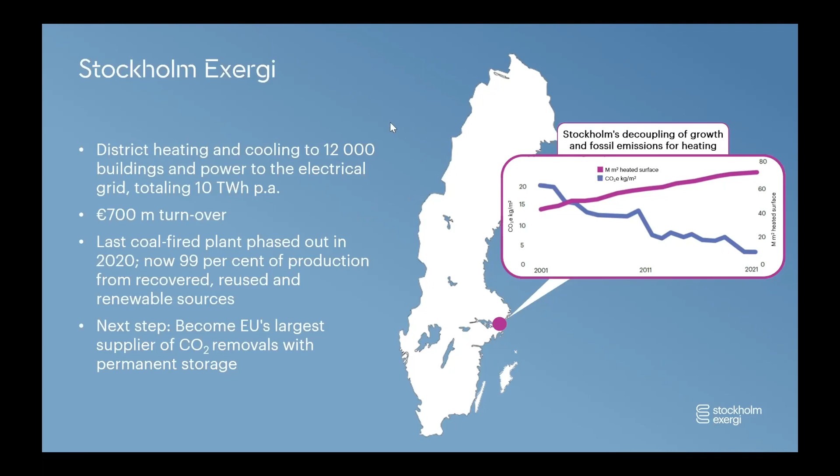In this work with becoming more sustainable and giving our customers a sustainable alternative for heating, we have also, as you can see in the graph on the right-hand side of the picture, managed to decouple carbon footprint from growth, which is something we are quite proud of. As a company, we are owned 50% by the city of Stockholm and partially by private pension funds, five of them, all European. So there is no majority owner in our company, but two equally strong owners, which has its advantages and other sides too.

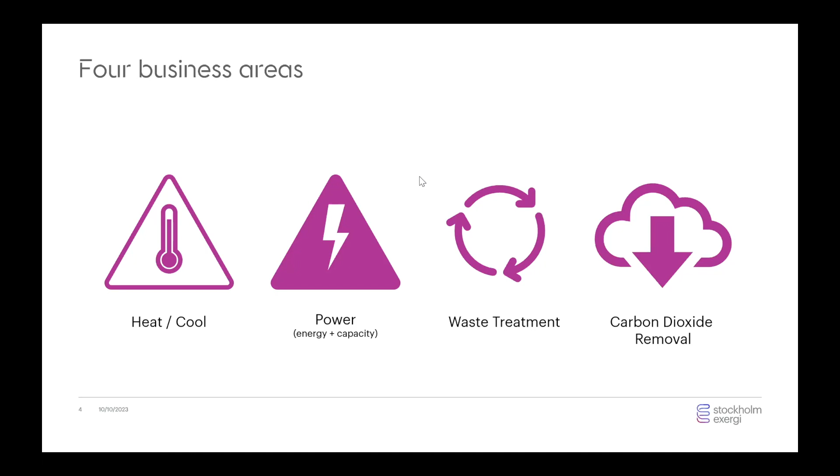From a business perspective, we work today in 3 business areas: one is heating and cooling, another one is about power production and also providing services to the power grid owners when it comes to capacity and balancing services. We are also heavily involved in waste treatment as a company, and now we are looking to establish a 4th business area, which is carbon dioxide removal.

So Stockholm and the city of Stockholm, I will tell you a bit about the platform on which we are now deploying BECCS, because I think it really matters. So Stockholm is a city of very many circular flows. And to introduce this, I will show you a short movie, which comes here, I hope.

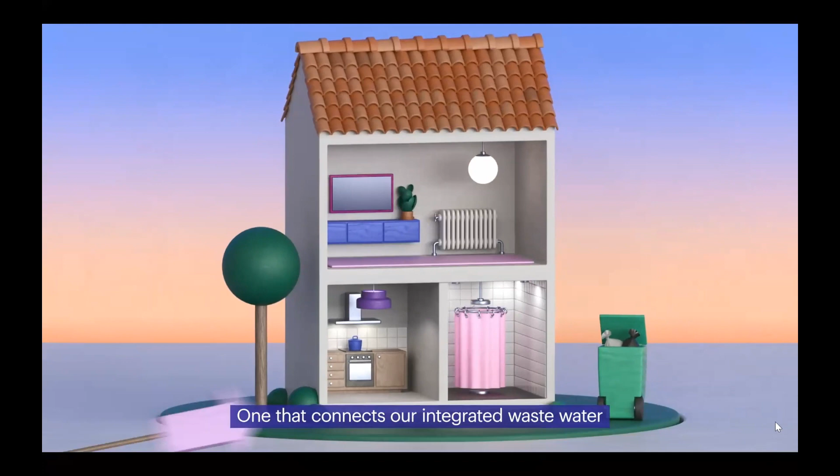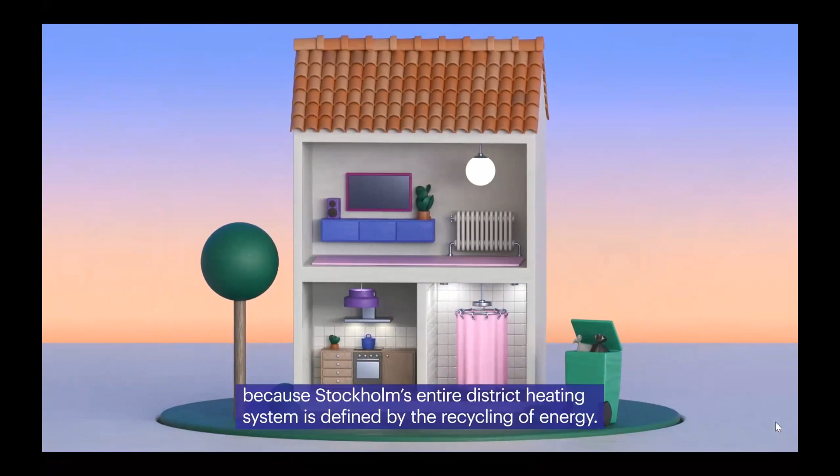Preparing food, dinner time, your evening shower, and finally relaxing with your smartphone. As you go about your evening routine, you're part of the world's most advanced energy system, one that connects our integrated wastewater, refuse, heating and electricity systems to maximize the amount of energy that is recycled. In fact, you generate a lot of this energy yourself because Stockholm's entire district heating system is defined by recycling of energy. So how does this work?

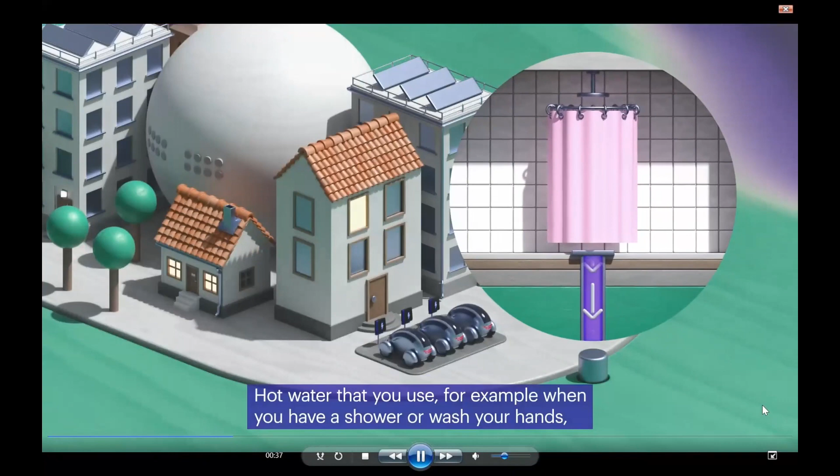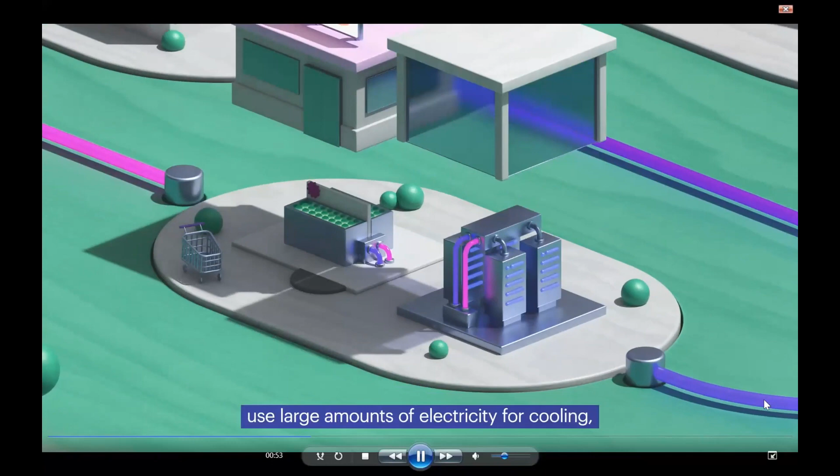Let's start with wastewater. Hot water that you use, for example, when you have a shower or wash your hands, disappears down the drain. We take the remaining heat in this water and turn it into new district heating. Then there's excess heat. Stockholm's data centers and grocery store refrigeration units use large amounts of electricity for cooling, which generates excess heat. We capture this heat and reuse it. And lastly, sorted residual waste. With sorted waste, Stockholm Exergi takes care of residual waste that cannot or should not be recycled. In this process, we recycle energy and generate heat and electricity.

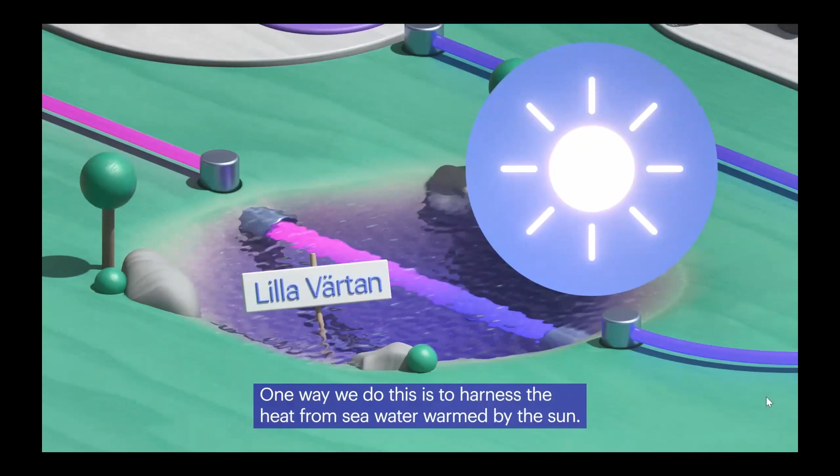We do this in combined heat and power plants, or CHP plants. Incineration of waste powers steam turbines that generate electricity, with steam then being used to heat water for district heating. A win-win situation. Electricity is supplied via the grid, and hot water is pumped into 3,000 kilometers of piping to your home. If recycled energy does not meet demand, we provide heat with the help of renewables. One way we do this is to harness the heat from seawater, warmed by the sun. We use this renewable energy for district heating.

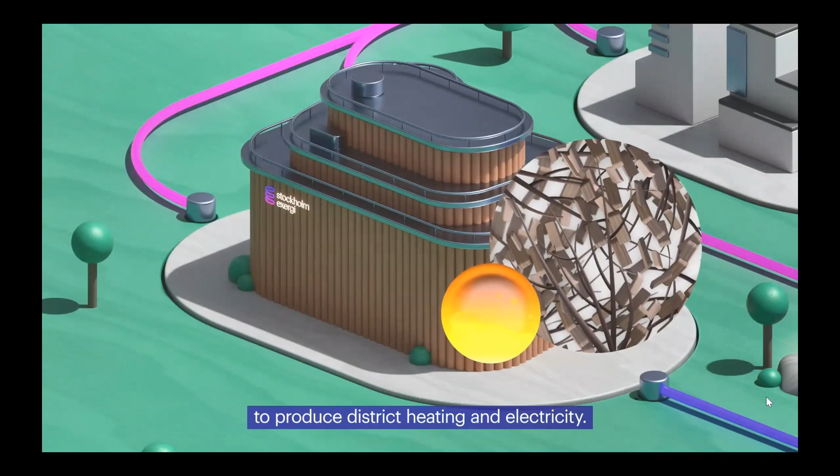We also use residual products from the forestry sector, for example, wood chips, branches, and treetops. All these become renewable biofuel that we burn at our plants to produce district heating and electricity. This is how Stockholm's district heating system works. We generate district heating and electricity entirely from recycled energy or from renewables. All this makes it easy for you to be part of a solution, which is both resource efficient and good for the climate. If you want to learn more, please visit stockholmexergi.se.

So this was a short introduction to the platform for innovation, which is what we consider our district heating system to be. The district heating system in Stockholm is really extensive. It's 3,000 kilometers of pipes sitting underneath the ground, which allows us to transport energy from where it's in excess to where it can be used, including, obviously, our own production, but also, as was mentioned in the film, we collect waste heat from different places in the city.

We actually buy this waste heat from the ones who can provide it, to use it in the district heating system instead of producing energy from fuels that can otherwise be saved. So this is a very important platform that we are now starting from when we are implementing CDR or BECCS in Stockholm. Oops.

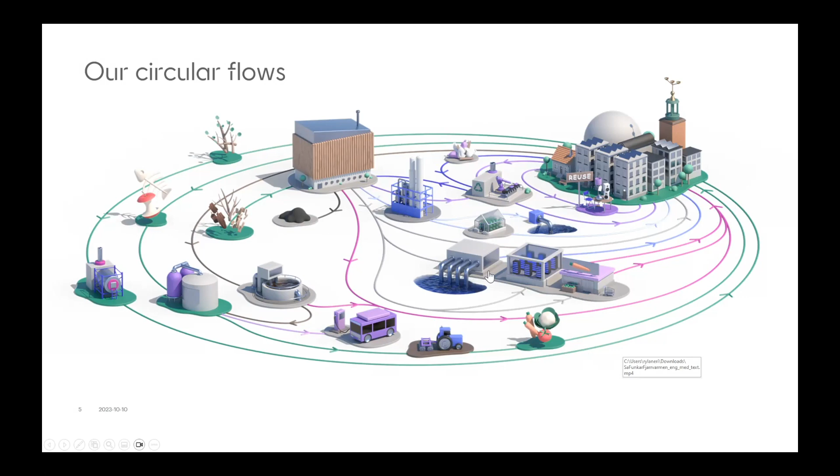When we use residues from the forest industry and paper pulp industry in Sweden, we are not harvesting any woods in Sweden just to burn them for bioenergy. All the harvesting is done by hardwood products industries and paper and pulp, and we take what they are not using from what they have harvested. So that would be trees, branches, tops, bark, that stuff. That is what goes into the energy production process.

And when we incinerate those residues in our plants, the same carbon that was once absorbed by the trees is released and normally emitted to the atmosphere again, so that this is a closed circle for the carbon. The same carbon that was once taken out of the atmosphere is released back into the atmosphere, hence a zero process.

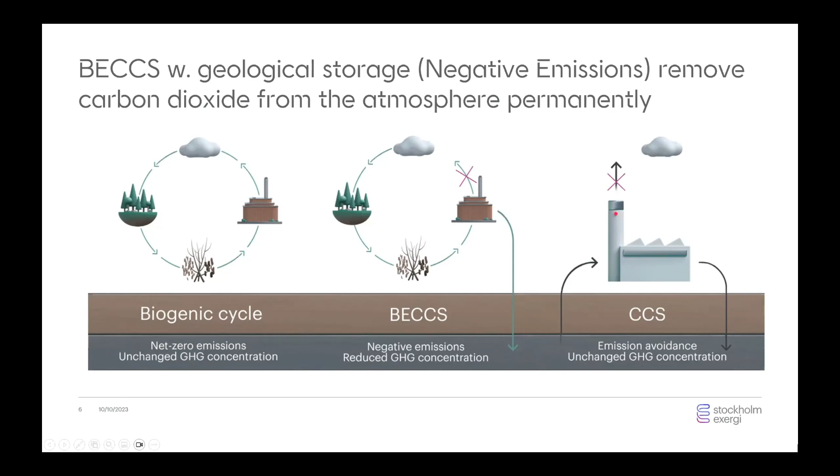So the project that we are now planning to deploy is a BECCS facility that will remove 800,000 tons of CO2 from the atmosphere on a yearly basis. We can also do this in a very energy efficient manner because of the district heating system, because all the energy that we invest in this process as electricity used in the capture and liquefaction processes can be reused as heat at the end of the process.

So we recover all the waste heat from the process, and this in the end sums up to that we are actually using more of the fuel energy going into the CHP after we have installed the CCS equipment than we actually do today. So it is a very energy efficient process with practically no energy loss. We are using sustainable biomass, and there, as I said before, we will do no additional outtake from the forests just because we are implementing this technology. I will come back more to the biomass and the criteria we have established for sourcing the biomass.

In this process, the capture process, we have chosen the HPC technology, which is hot potassium carbonate. This is a very mild chemical, and one reason for choosing that chemical is that we are operating in the middle of a city, in the middle of Stockholm. So, for example, amine technology we consider less suitable in this case. Also, we have a fairly high concentration of CO2 in our flue gases, around 19%, which is beneficial if you want to use the HPC technology.

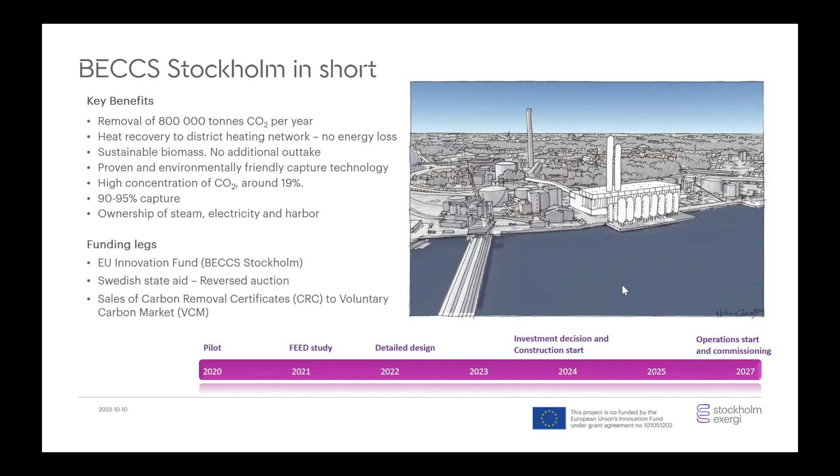We have also, in the meantime, submitted our environmental permit application to the Swedish courts, and we are looking to get a positive decision from that court in February. So far, it looks very good. If we are able to make the final investment decision in mid-24, which is obviously depending on several factors, for example, that the funding is working out, but it looks promising at this point, I would say, we will be able to commission and go live with this plant in 2027. So start delivering to our customers in 2027.

So this biomass is then incinerated with carbon capture and heat reuse. After we have captured and separated the CO2 from the flue gas, we will liquefy the carbon dioxide and we will send it to a buffer storage from which we can load it to ships that will take it to the North Sea area, either on or offshore storage, but geological. And we have not yet chosen which project to store with because we simply want to follow them a bit longer before we make our final decision.

There are several projects being developed at the same time, in parallel with our project. So we need to follow those a bit longer before we make up our mind who we believe will be the best bet for us. But this is also something that needs to converge for us before we make our final investment decision mid next year.

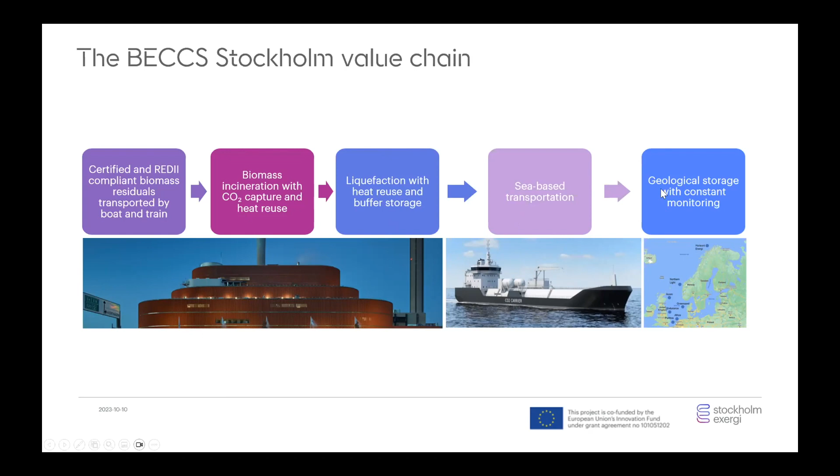All right, so doing this and addressing the market, we need to be able to specify the product that we are selling. And so we took the decision to develop our own methodology for what we consider sustainable BECCS. We were a bit inspired by Climeworks, who came up with a first draft methodology for DAC about a year ago.

So now we did this development work together with Drax, which is one of the other leading suppliers of BECCS. We were helped out by Eco engineers, and we also had McKinsey on the team. So this methodology defines what is the net carbon removal unit, the CRU, that we will be selling, which is then based on BECCS from sustainable biomass and permanent storage.

And this methodology has now been developed for a European environment first and foremost, but it works also outside, but it's very, very heavily relying on existing EU laws and regulation. Also because there is quite mature and good regulation in the EU when it comes to biomass and biomass for energy.

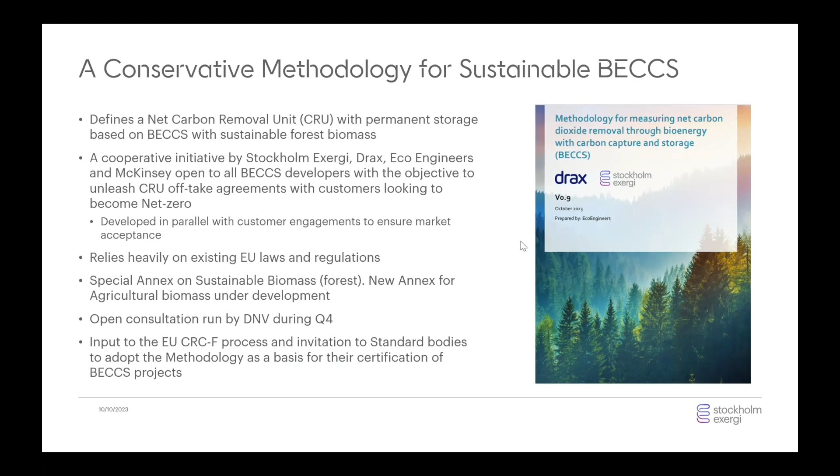So I think the most important part of this methodology, and what we have spent the most time on, is how to define sustainable biomass, because BECCS cannot be sustainable and cannot be considered a good thing unless you are using truly sustainable biomass. And in this case, the foundation for the rules that we have set up for our sourcing is based on the RED II, which is the Renewable Energy Directive within the EU, and specifically Article 29 within that regulation. And we have developed 4 key criteria that will guide our sourcing of biomass under this methodology.

Well, there is quite a bit of text on this in the actual document, but to summarize, this is about that we can only source from areas where the carbon stock is maintained or increasing. If a forest starts to become a carbon emission source, then that is not a good way of doing forestry, and then it's not contributing to lowering the concentration of carbon in the atmosphere. So, under those circumstances, we cannot source any biomass from those forests, and this is evaluated on a jurisdictional level.

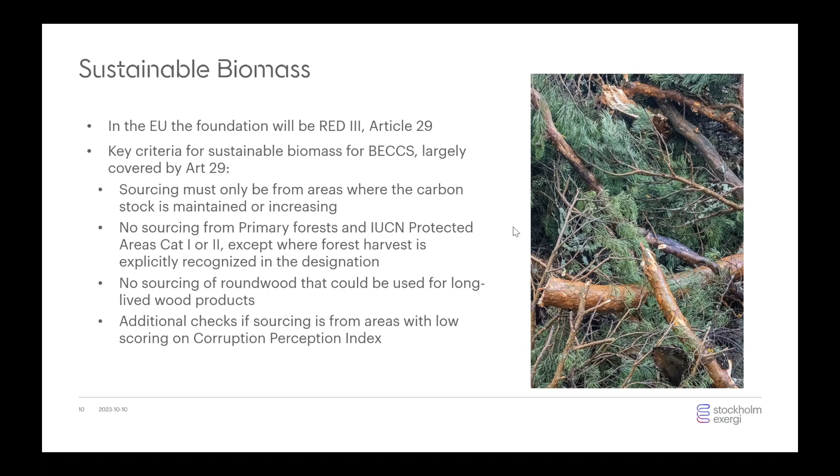So is there then a possibility to scale BECCS throughout Europe and the Nordics? To start with the Nordics, there is a very good potential for BECCS. In Sweden only, we have about 30 million tons of biogenic CO2 already present in point sources spread out through the country. This would be energy facilities, bioenergy facilities, paper and pulp mills, and also waste incineration plants, which have a 50-50 rating, more or less. I mean, 50% fossil, 50% biogenic flue gases.

Very good potential in Sweden. Also, the long-term estimated need of negative emissions in Sweden to reach a net zero position would be around 10 million tons after all the reductions have been done. So Sweden will, in the long term, be able to become a net exporter of negative emissions to other nations that maybe are not as well positioned.

Looking to the east of Sweden, we have Finland, which has even more biogenic CO2 already in different point sources, up to 46 million tons. So also in Finland, there is a very good outlook to deploy BECCS. They are a little behind Sweden today, but I'm quite sure that they will also start this development process.

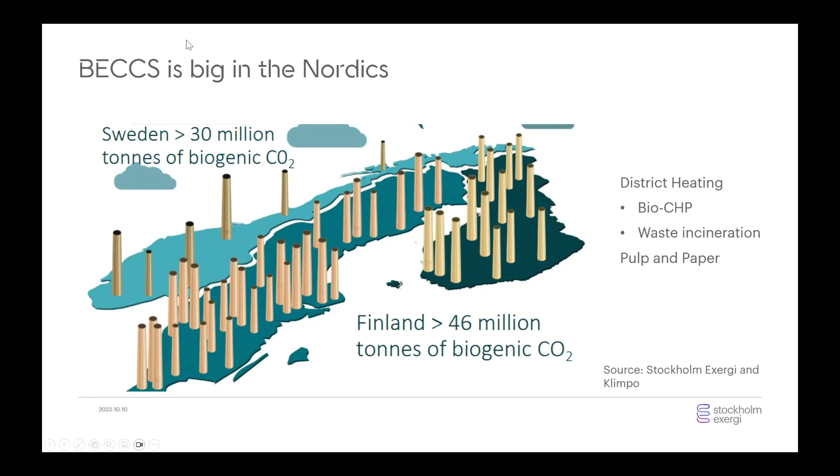If you broaden the view then and look at all of Europe, we find that there are more than 460 existing point sources with a total removal potential of 130 million tons of biogenic CO2 per year. Also, in the vicinity of those point sources, you find 380 district heating systems or networks, where the excess heat could potentially be used.

District heating is not as common in continental Europe as it is in the Nordics. In the Nordics, I would say that every city has a district heating system. In continental Europe, as you may be aware, this is not as common, but a great potential when it comes to tackling climate change, as one of the biggest carbon emission sources in Europe is emissions from heating with gas. So if we could substitute gas heating with district heating, which is based on recovered heat from different industrial processes, this would be a very big advantage and a big step towards a better climate.

But you should also notice that the plant that we are planning for is 800,000 tons per year of removed carbon, 0.8 million tons per year. The IPCC have concluded that by 2050, the world probably needs around 5 gigatons of removals per year to stay net zero. And if you just estimate that half of that could come from BECCS, that would be 2.5 gigatons. I think that even that may be tough, but say that half comes from BECCS.

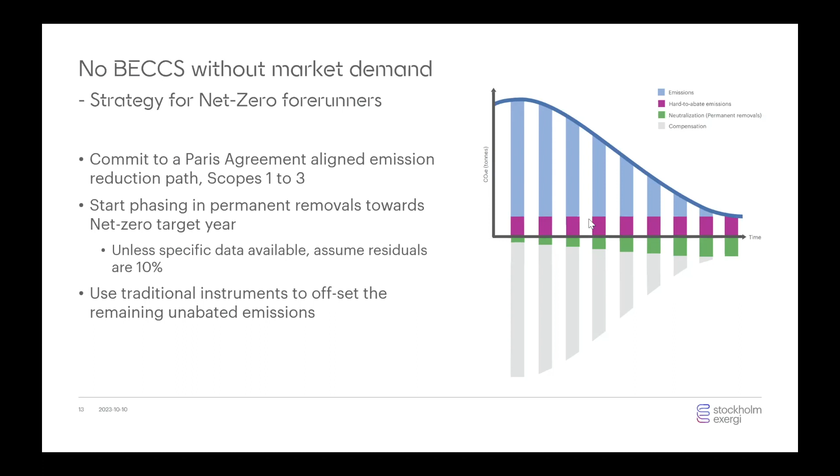And in the end, to claim such a net zero position, as you know, you need to neutralize your residual emissions with permanent removals. But there will never be enough removals by 2050 if we are not starting to develop this already today. So this is extremely important, obviously.

So we are one of the first projects, and at this point, as I said before, we are right now concluding these offtake agreements with different companies. Of the 800,000 tons we have today, we have committed about half of that yearly volume during the first 10 years of production to different companies, and we are looking to enter agreements on the rest of the volume too.

So at this point, 10-year contracts to support this investment decision of ours in 2024, and payment will happen at delivery. Right, that was all I was planning to say during my presentation. So I now look forward to some questions.

That was excellent. Thank you so much. And congratulations on having sold half of your first 10 years of offtake. That is very impressive. Any buyers in the audience, we can provide you with Erik's contact info.

So that was a really great overview of BECCS, and very exciting what you're building there in Stockholm. First of all, just to talk about your sustainable feedstock sourcing guidelines, I think they're super admirable, and it would be nice to see others adopt similar guidelines in the BECCS space. Is that something that you're committed to for this particular plant, or are you committed to it more generally? Can you talk a little bit about how you think about that?